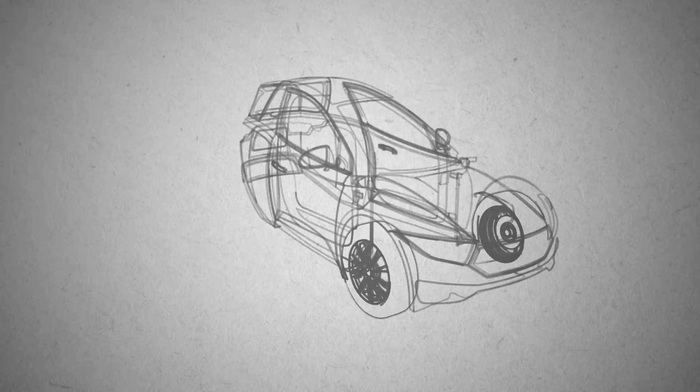We knew right away that if we were going to try to meet any kind of timeline, there was never a chance that we were going to be doing this on paper. This had to go from stylus sketch into a digital design immediately. We were told that automotive firms have 200 engineers in a room and it takes them a year and a half to design a taillight.

We just designed the whole car. This car had to hit the ground and actually function. It had to perform like we expected it to. Suspension had to perform, the drivetrain had to perform.

Rich was brought on a little bit later in the process to do finite element analysis, chassis design and development. What we're looking at is a totally different way of thinking with these smaller companies and the way that they're approaching problems. And they have smaller budgets, but they have more nimble teams.

And what they're looking at doing is getting tools which enable them to achieve engineering excellence on small budgets with small teams. And tools like NX, SimCenter allow them to do that.

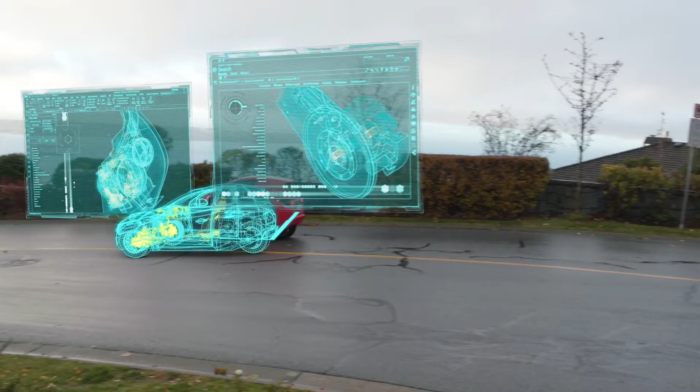So we have 75,000 of those cars coming out in the next 3 years, and more manufacturing people that we're reaching out to, top-level manufacturers. When I speak to a top-level manufacturer and I tell them what software we have our car fully designed and engineered on, it makes my life and their life a lot easier to deliver those cars to consumers.

So that manufacturing provider in China, Zongshen, is also using NX as the primary tool for the design. So they will take our design, evolve it slightly for high volume production, and look at all the different moldability, formability requirements that they have for their mass volume production.

We're actually able to talk to our vendors. We're able to talk to our engineer in Michigan, and he's able to talk to Tammy here in our office, and we can talk everything from mechanical bits to electrical components to wiring diagrams and everything else.

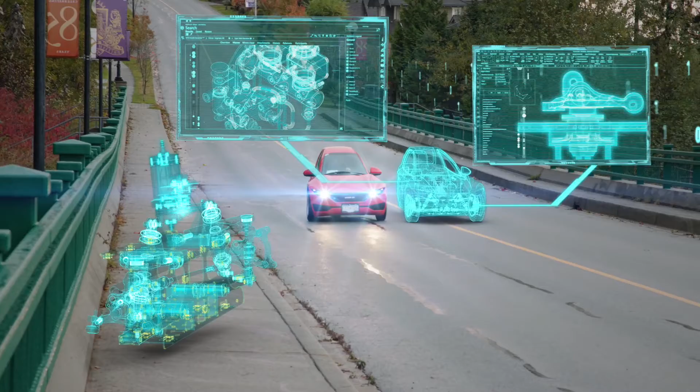With SimCenter, we have a direct parametric link back to the CAD data, all in the one GUI. So that means that we can analyze the design, work out, hey, can we move this? Can we reduce some mass here? Go back into the design, iterate it, 2 clicks, and we have our results updated.

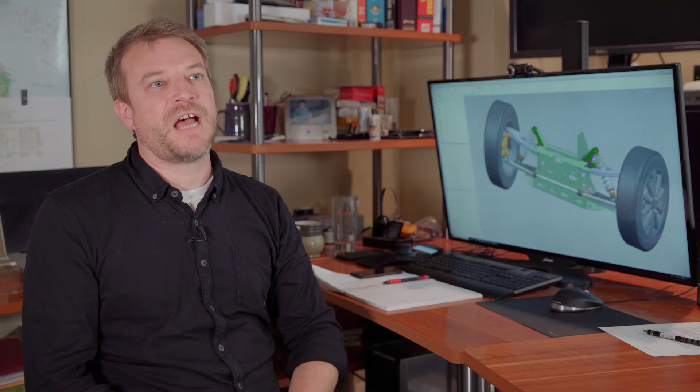These are things that were new to Meccanica before we started working with Maya and Siemens and pulling this in. But we brought in some fresh scrubbed young engineers in mechatronics, mechanical engineering, electric engineering.

Tammy and the team have done a fantastic job of pulling in what they know, what Henry and I didn't know, what they said, oh, if we can get this software, this is going to be awesome. Faster to market, less chance of error, better value for the end buyer of the car.

Maya and Siemens can provide us the tools to make your company great. SimCenter helps a lot with certification, predicting what might go wrong, help us accelerate the process.

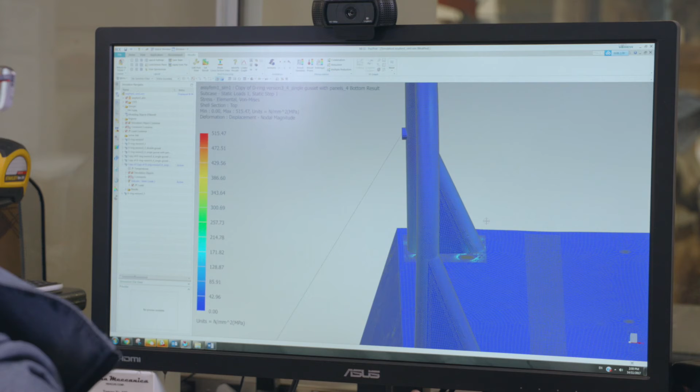If we have all the assemblies sent out for testing and then come back with feedback that it failed, that would be about 2-3 months if I do analysis on it. And it took me about a week or 2 weeks of setting it up, and that's way quicker, way faster, and save a lot of time and money.

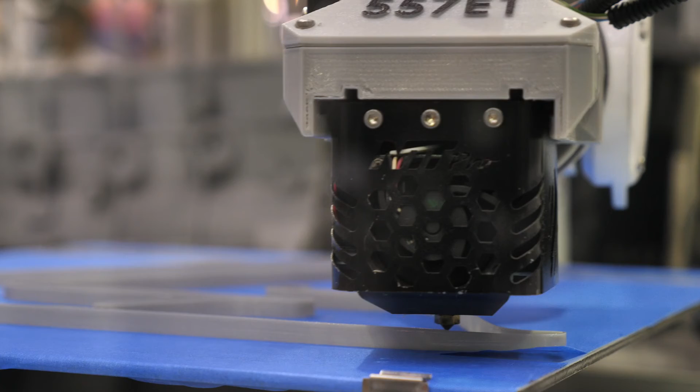With Siemens and the 3D printer, we can design it, print it out right now. We can get it the next day, maybe 2 or 3 hours later, and then put it in the car, try out if it fits.

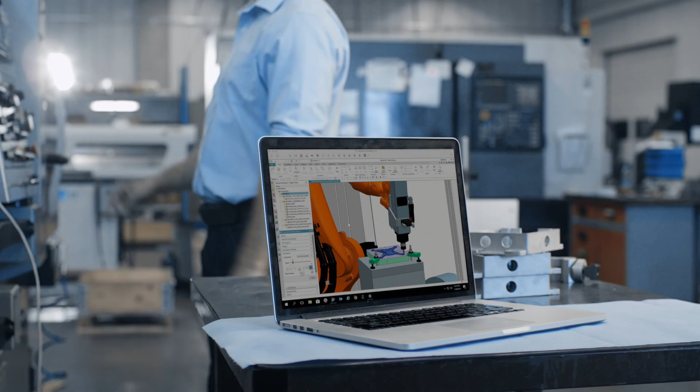So we'll generate our parametric toolpaths here, which is another benefit to keeping everything inside of the one system. Have it fully parametrically linked into our CAM software, which is inside of NX as well, and then straight to our CNC machining center.

The engineers that we're using at Electra Meccanica are so inspired that we can sit around, come up with an idea, or even they're coming up with an idea, or Henry's come up with an idea, boom, it's ready to go.

That's awesome. You're literally unleashing the potential of the human being to not just think of a solution that will work, but create it. And there's magic in there.